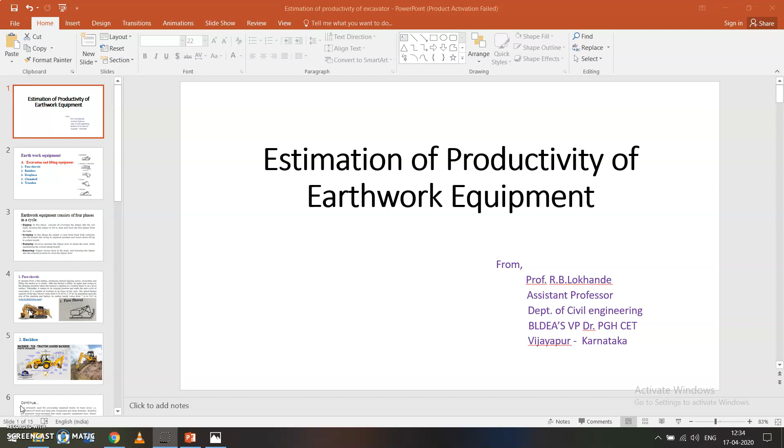I want to discuss the topic of estimation of productivity of earthwork equipment. These are the earthwork equipments: face shovel, backhoe, dragline, clamshell, and trenches.

Earthwork equipment consists of 4 phases in a cycle. First is digging, where crowding the dipper into the soil bank takes place. Once the bucket is full, it is pulled back at a certain height. Next is swinging.

Once the bucket is lifted off, it should be free vertically and horizontally, so it can swing to the required position at the dumping site at the required height.

Next is dumping: opening the dipper door and dumping into the dumper while maintaining proper height. Once the dipper gets empty, it returns to the original place, is lowered down at the required position, and at the same time the dipper door is closed.

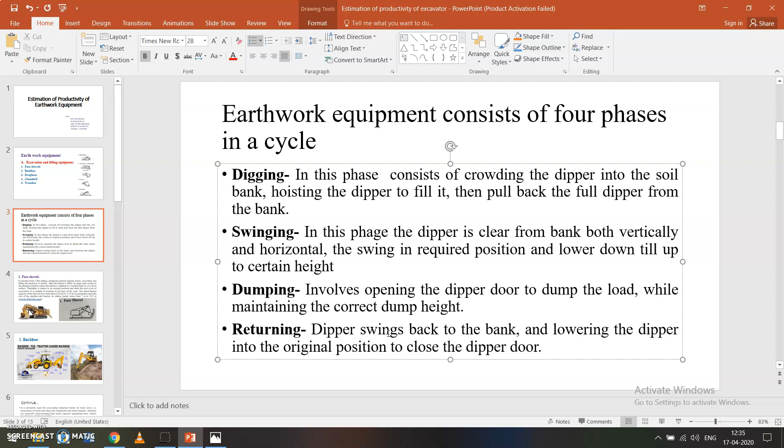So what exactly is the dipper? This is the dipper - this bucket is the dipper.

Face shovel operates on a flat surface, producing upward movement. By maintaining the cable, it excavates above the track level of the vehicle, and the upward movement takes place while the bucket gets filled.

This is normally used for excavation or removing loose soil, and it may be track mounted or wheel mounted. Track mounted are used in hilly areas and wheel mounted are used in smooth areas. Its bucket capacity is 0.38 cubic meters to 3.25 cubic meters, and the cutting length of the bucket is 7 to 10.5 meters.

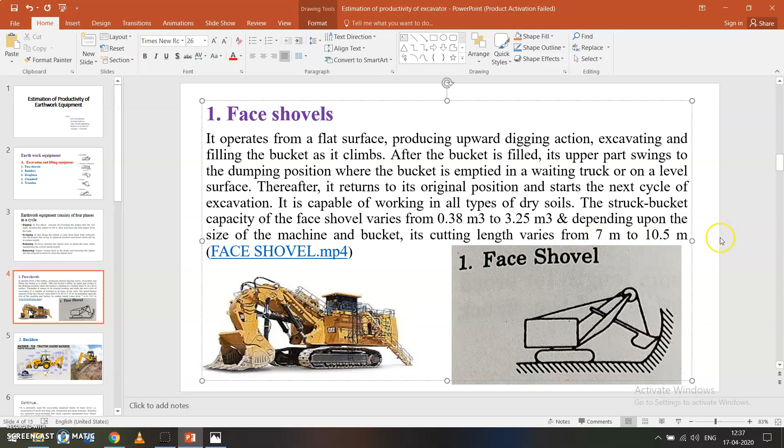And this is the backhoe. Everyone knows this as the JCB, and everyone has seen it at construction sites.

It is primarily used for excavating material below the track level. This is the track level, and the excavation of material happens below it, with an upward movement taking place here too. Using the boom, the bucket is struck into the material and filled, then at the required position it is swung and unloaded.

Here too it is either track mounted or wheel mounted, with buckets depending upon requirement. Bucket capacity is once again 0.38 to 3.25 cubic meters, and the depth of digging varies from 5 meters to 9.5 meters. It is used for excavation of small and large pits, basements, and large trenches also.

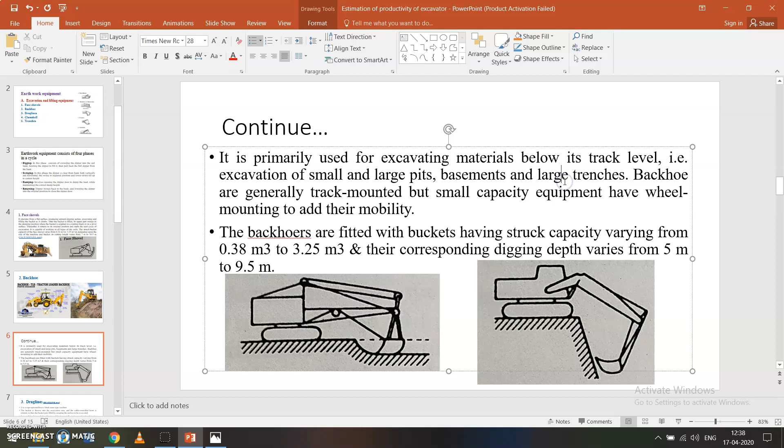For this type of excavation we use the backhoe. Next, draglines.

These are the two cables mounted with the bucket, and the bottom portion is opened. It drags towards the equipment side, and when the bucket gets filled, it is lifted up using this cable. It is actually used for the excavation of loose soil.

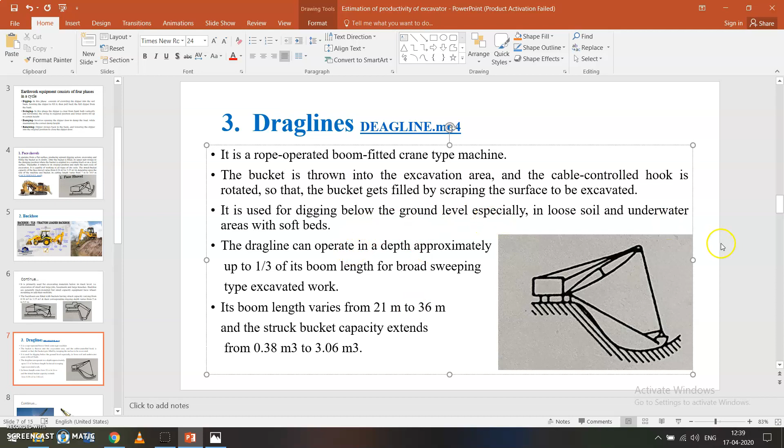It is used for riverbed sand excavation or removing purposes, and the bucket capacity is 0.38 to 3.06 cubic meters, with a boom length of 21 meters to 36 meters. These two cables are mounted between the bucket.

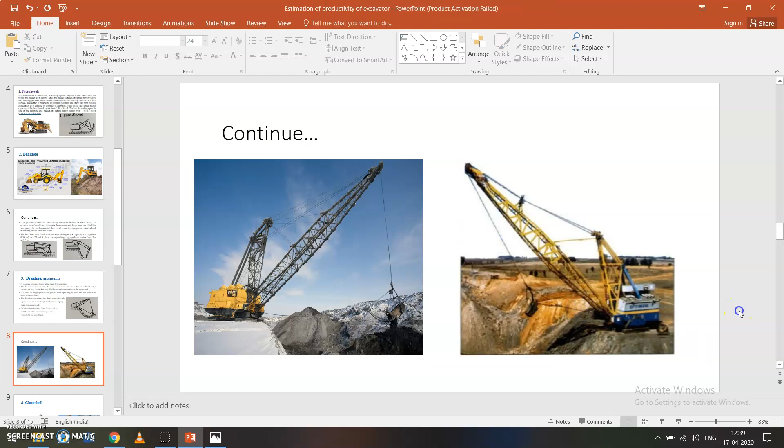This is the clamshell. The clamshell has two half buckets, hinged at one point, with the bottom lowermost parts opening at the time of excavation into the river bed or sea bed. These are the teeth, which are inserted into the soil bank or sand bank.

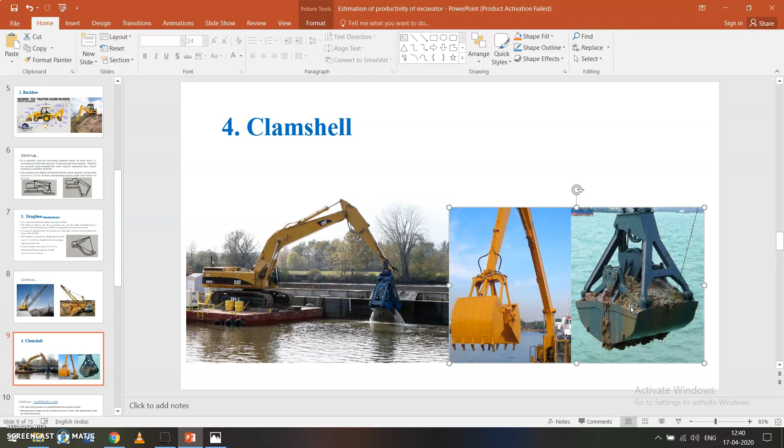Next it is inserted at a certain depth, and these two buckets are brought closer together by maintaining this hydraulic arm. The buckets close together, the material gets filled, and then it is lifted up. See here, they are lifting here. So this is...

This is commonly used for dredging, that is excavation of soil, excavation of sand from the seashore or sea, and for excavation and material handling purposes also it is used.

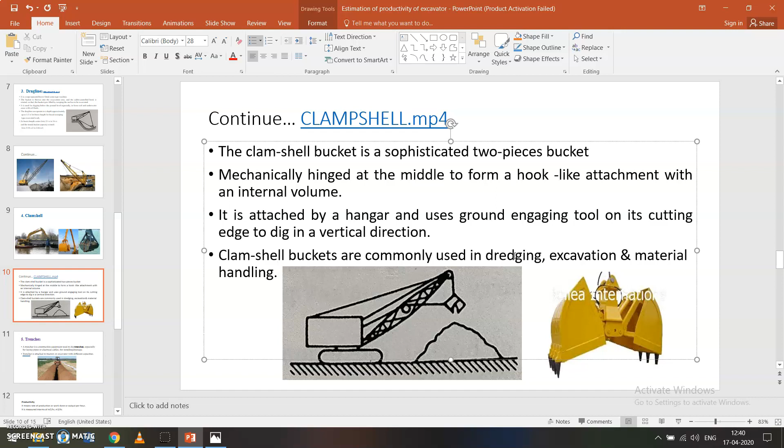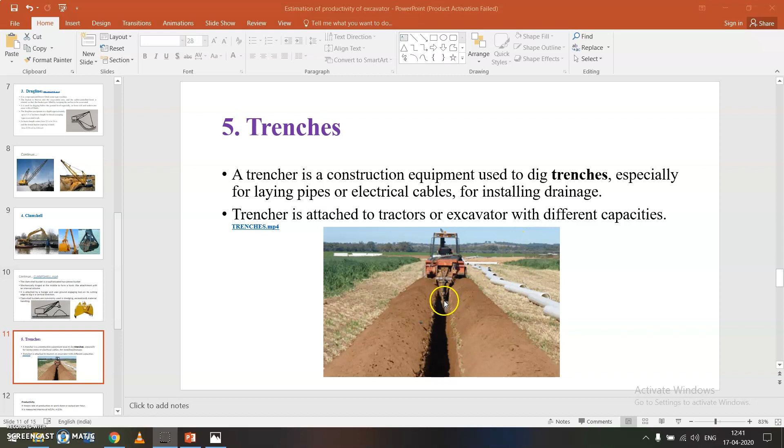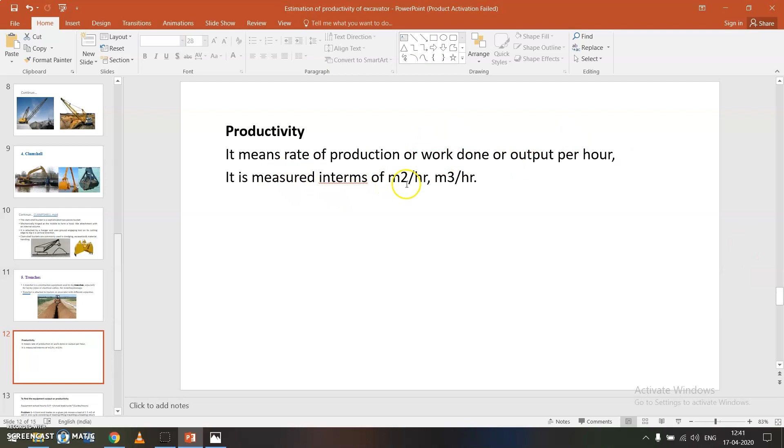Next, productivity. Productivity means the rate of production per hour, that is work done or output. It is measured in terms of meter square per hour or meter cube per hour.

Next we have to discuss one of the problems, which is to find the equipment output. The equipment actual hourly output is equal to actual load per cycle multiplied by number of cycles per hour. So this is one of the formulas.

Here is the problem: a front end loader on a given job condition moves a load of 1.5 meter cube of soil in one cycle, which consists of loading, lifting, traveling, unloading, return trip, and getting ready for loading. This cycle requires 1.2 minutes. Find the actual output of the loader. So here it is the bucket capacity, and this is the time.

Equipment actual hourly output is equal to, using the same formula here: actual output equals actual load per cycle, that is 1.5, times cycles per hour. How many cycles per hour? That is 60 by 1.2, which is 50 cycles. 50 into 1.5, that gives 75 meter cube per hour.

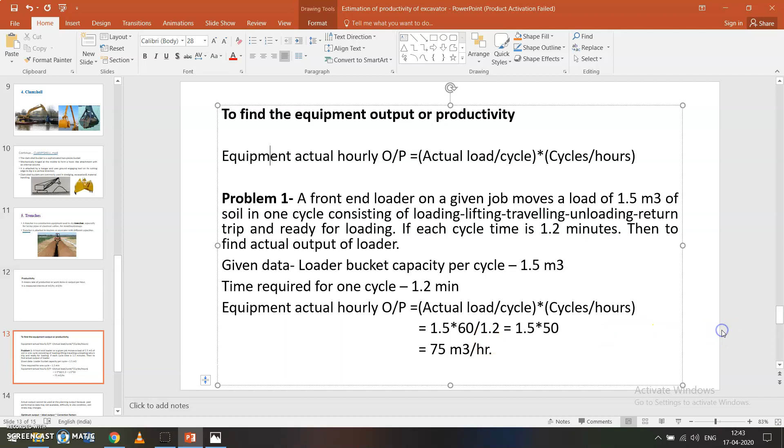So this actual output cannot be used at the site for planning purposes, because there are a number of reasons. The bucket cannot always be filled to its full capacity, because of the difficulty of site conditions and soil strata, which may be hard or loose. It depends upon those criteria, based on which the bucket cannot get full.

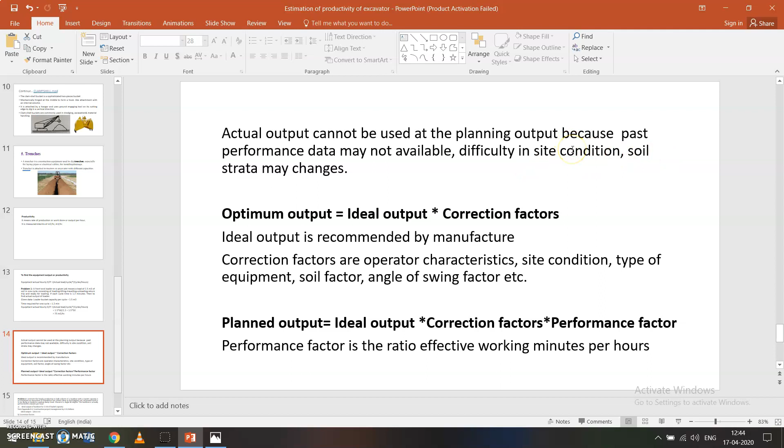Next, for that purpose, we have to find the planned output, that is the site planned output. For that purpose, we have to find the optimum output, that is the ideal output into correction factors.

Ideal output is given by the manufacturer, and there are correction factors, which include many things: operator characteristics, site condition, type of equipment, soil factor, and angle of swing.

The angle of swing may be 45 degrees, 75 degrees, 90 degrees, and so on. Site condition may be a difficult site condition. Type of equipment may be a backhoe or a face shovel or anything. Next, soil factor may be hard soil also.

So planned output is equal to the ideal output and correction factors we discussed. There's one more factor, the performance factor, which is the ratio of effective working minutes per hour. That means the equipment may be used effectively for only, say, 50 minutes in a given 1 hour.

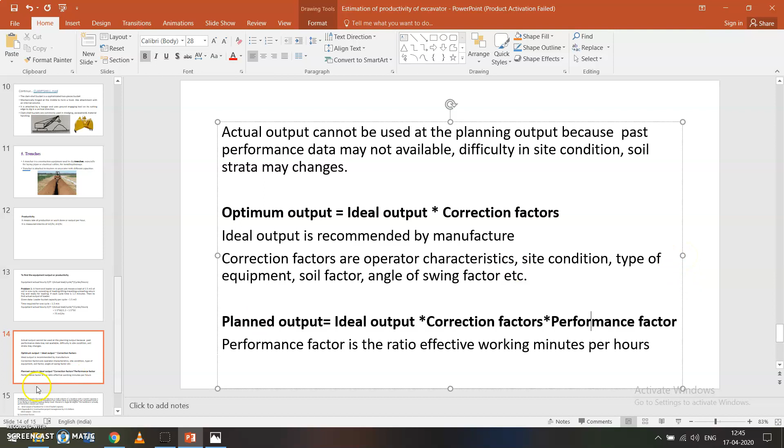That is the next problem we will solve, based on planning output at the construction site. Estimate the hourly production in bulk volume of a backhoe with bucket capacity 1 meter cube, employed on excavation of a foundation 5 meters deep in hard digging soil.

Excavated earth is to be dumped and loaded in a waiting dump truck placed at an angle of 90 degrees, that is a swing angle. The backhoe actually performs 45 minutes per hour. So this is the given problem.

So we have to look at the data given: bucket capacity is 1 meter cube, it is hard digging soil - that's one factor - it is loaded in a waiting dump truck - that's another factor - swing angle is one more factor, and it is a backhoe, which is a type of equipment - that is one more factor.

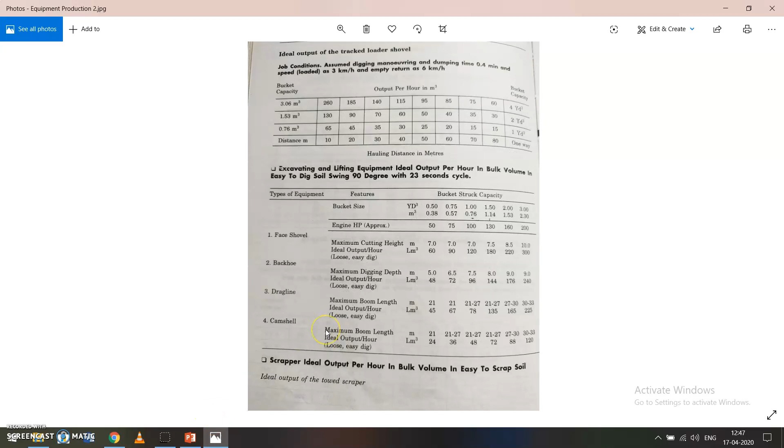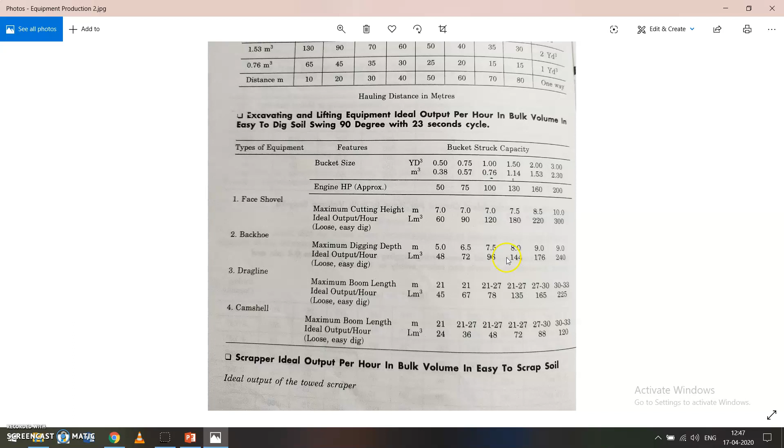So here we have to calculate the ideal output for the 1 meter cube bucket. For a 0.76 meter cube bucket capacity, the ideal output is 96, and for 1.14 meter cube bucket capacity, it is 144.

But I want the ideal output for 1 meter cube of bucket capacity, so we have to find it by doing interpolation. That is, I got 126.3 meter cube.

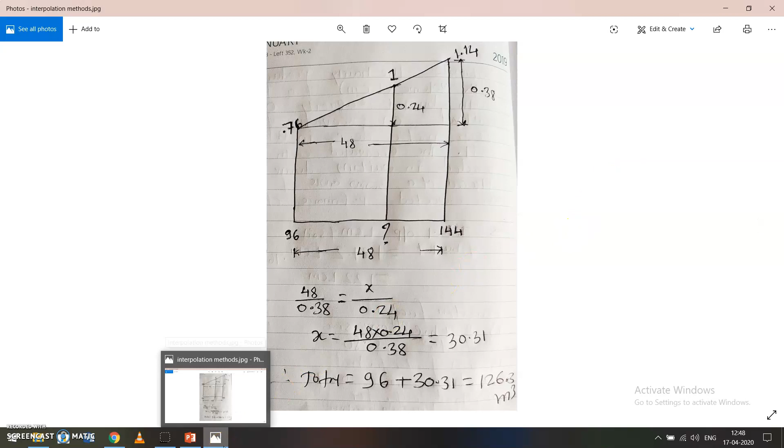So this is 126.3. These are the values I got from the construction management book, that is Chitkara, appendix 9.1, and the correction factors.

So these are the correction factors. The first one is the equipment conversion factor. If it is a face shovel, it is 1. For a backhoe, it is 0.8. The equipment here is a backhoe.

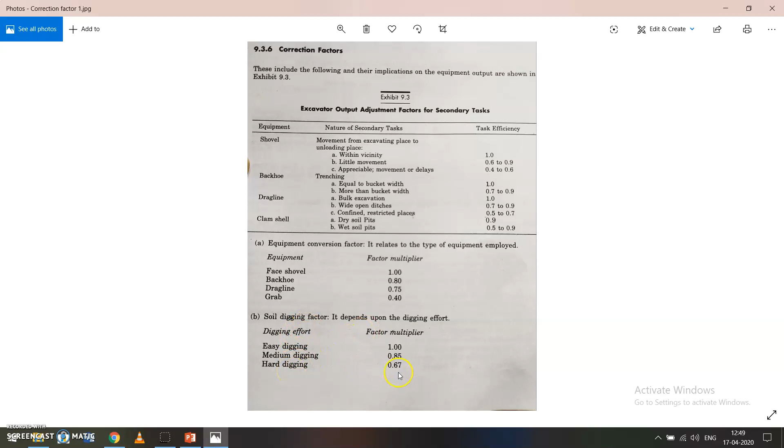Hard digging soil is one more factor, the type of soil is the soil factor. Hard digging soil is 0.67, easy or loose soil is 1.

These are the factors. Next is loading into the dump truck - that is one more factor, the waiting dump truck. So here, loading into a vehicle, that is the dump truck, is 0.8. So it is the load casting factor, that is 0.8.

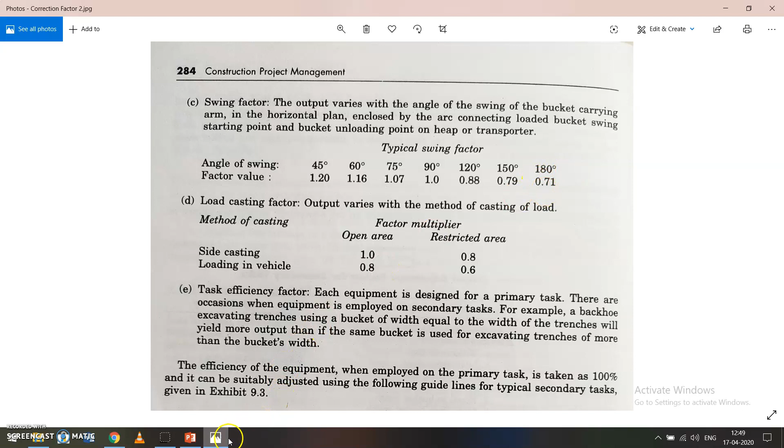Next, the angle of swing is 90 degrees - that is one more factor. For 90 degrees, the multiplication factor is 1. If it is 45 degrees, it is 1.2. If it is 180 degrees, then it is 0.71. So these are the factors. The angle of swing here is 90 degrees, hence it is 1.

So the correction factor is calculated by multiplying all four: 1, 0.8, 0.67, 0.8, 1. So we got the performance factor. That is 45 minutes, actually worked in 1 hour. So 45 by 60, then it is 0.75.

Then planned output is equal to the ideal output of the equipment multiplied by the correction factor and performance factor. The ideal output is 126. The correction factor is 0.428 and the performance factor is 0.75. Then I got the value of 40.54 meter cube per hour.

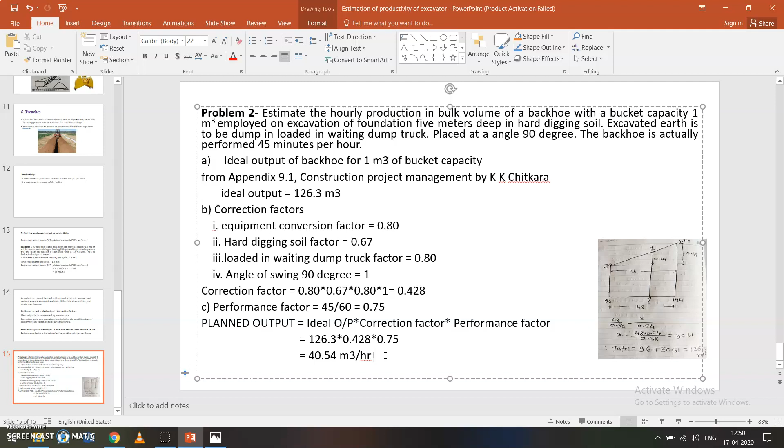This is the planned output, not the actual output. Planned output is actually used at the site for planning the equipment, by considering all these factors - we use planned output considering all the difficulties and everything. Thank you.